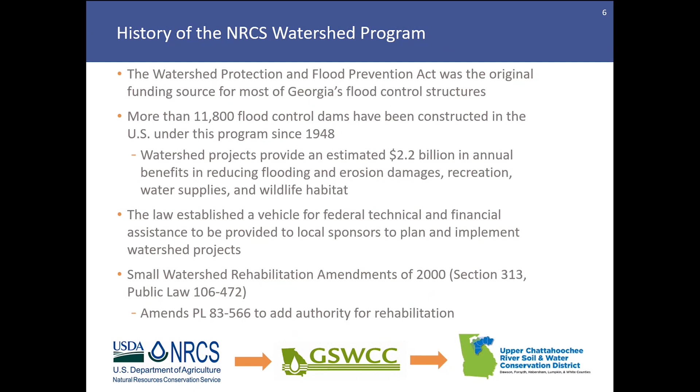In totality, the watershed projects in the United States provide an estimated $2.2 billion of annual benefits by reducing flooding and erosion damages, providing for recreation and water supply and wildlife habitat. The law established a vehicle for federal technical and financial assistance to be provided to local sponsors to plan and implement watershed projects. Small watershed rehabilitation amendments of 2000 added authority for rehabilitation. Projects eligible for federal assistance include flood mitigation, watershed protection, water supply, water quality management, agricultural water management, public recreation, and watershed structural rehabilitation.

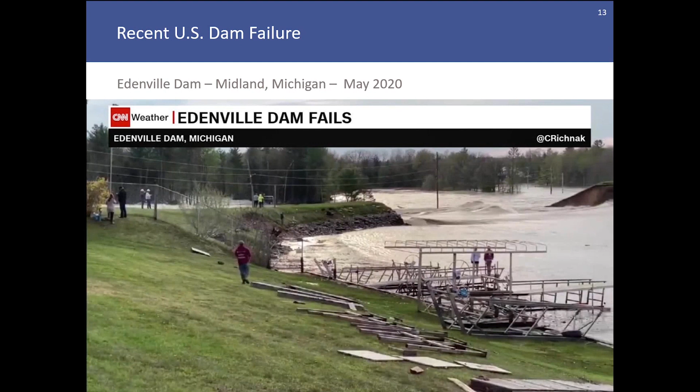Dam safety agencies include the Federal Energy Regulatory Commission, the NRCS, FEMA, the Federal Emergency Management Agency, the U.S. Army Corps of Engineers, the United States Bureau of Reclamation, and the Georgia Safe Dams Program, Department of Natural Resources.

The Georgia Safe Dams Program began with the Safe Dams Act of 1978, largely in response to the Kelly Barnes failure in Toccoa. By definition, a dam is an artificial barrier, including appurtenant outlet works such as spillways, pipes, risers, etc., which impound or divert water. Specifically, the dams have to be 25 feet or more in height from the natural bed of the stream or watercourse, or, and that's an important distinction, have a maximum impounding capacity of at least 100 acre-feet.

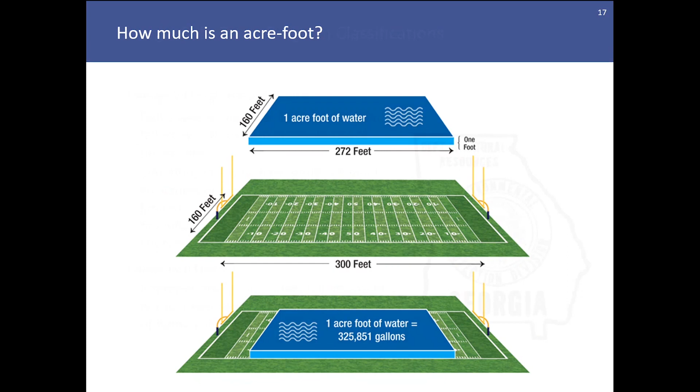In essence, the Georgia Safe Dams Program has 3 classifications: exempt or not even considered for regulation, which will not be discussed, Category 2, and Category 1. Category 1 are high hazard dams where improper operation of a dam would result in the probable loss of human life. Situations involving the probable loss of human life include occupied structures or facilities, not limited to residences, commercial buildings, manufacturing facilities, schools, churches, playgrounds, etc.

Category 2 dams are structures that are large enough to be regulated, but where improper operation or failure would not be expected to result in the probable loss of human life.

Briefly, I'd like to discuss the components of a dam. The principal spillway, which many people call the drop inlet, is located in the lake. The principal spillway, or riser, or drop inlet, is attached to a conduit that passes beneath the dam and terminates into the outlet works, stilling basin, or plunge pool.

The auxiliary spillway, which can be concrete or earth, is generally located in one of the 2 natural hillsides on either side of the dam, but at times can be located over the embankment itself. The upstream slope is the angled or sloping portion of the dam upon which the water rests. Engineers consider dams looking in the direction of stream flow, so the downstream slope, or the dry side, would be opposite the upstream. The abutment is the contact upon which earth fill is placed against natural ground to form a dam.

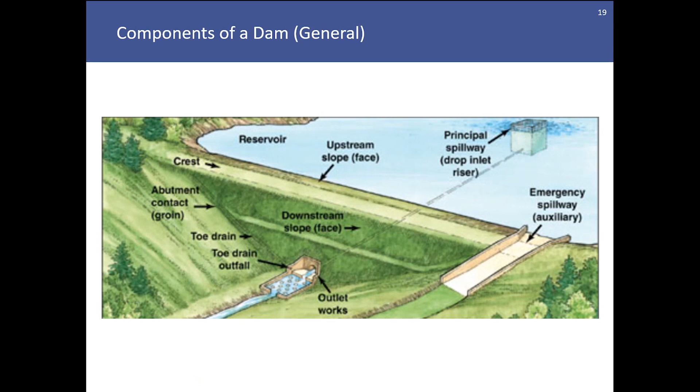For the Settingdown Creek dams, or the watershed dams, the existing facilities have earth-cut auxiliary or emergency spillways and have principal spillways or drop inlets or risers connected to circular conduits through the base of the dam. On the upstream side of these drop inlets or risers, there are gate valves that can be utilized to lower the water.

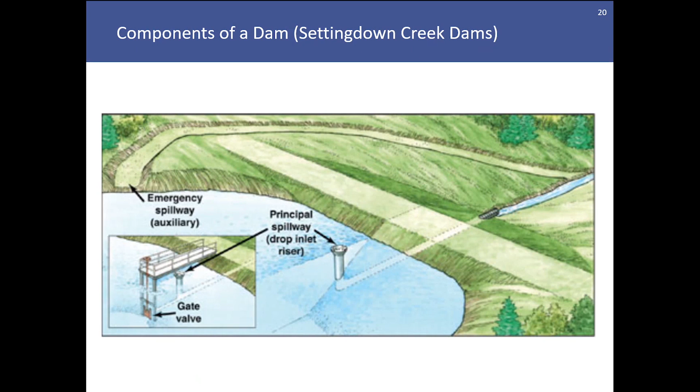The Settingdown Creek watershed is located in the northern portion of Forsyth County, Georgia, and is a tributary of the Etowah River. The watershed contains over 34,000 acres of drainage area or land that drains to the creek. The original watershed plan, which was prepared in 1954, provided for the construction of 15 floodwater retarding structures or dams. Note that I said earlier that Forsyth County has a total of 17 floodwater retarding structures or dams. Therefore, the Settingdown Creek watershed has the vast majority.

The map shown here provides an outline of the Settingdown Creek watershed. As shown, a small portion of the watershed extends into Cherokee County, and an exceptionally small portion of the watershed extends into Dawson County. To aid viewers with the general alignment of this watershed, the blue line on the right side or east side of the watershed is Georgia State Route 400, and the vertical white line near the north arrow is the boundary between Forsyth County and Cherokee County.

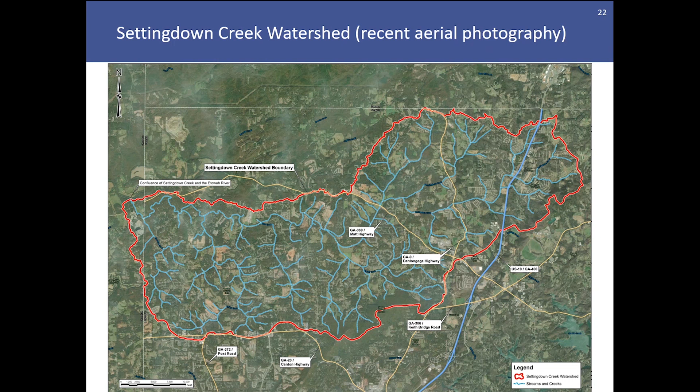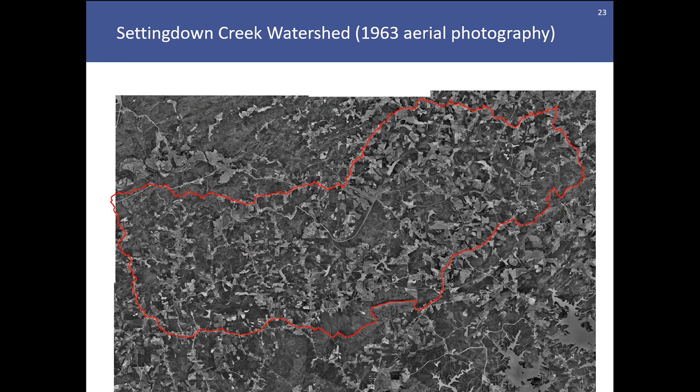The map shown before you depicts the aerial photography of the same watershed in 1963. As shown in this photograph, Forsyth County was largely comprised of agricultural activities, especially in this location, whereas today there are a significant amount of developments in the northern end of Forsyth County.

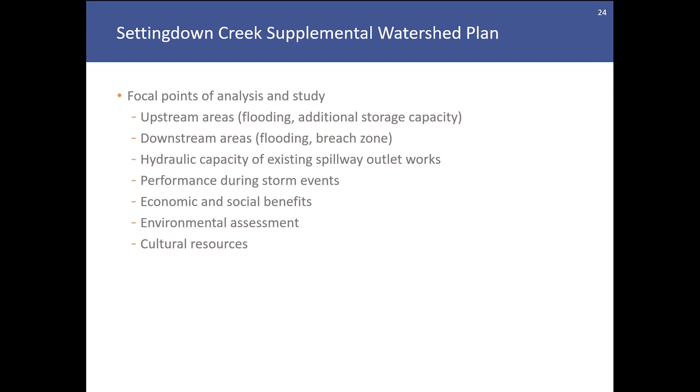For the supplemental watershed plan that's being developed, there are numerous focal points of the analysis. Provided below are some of the items that will be considered: upstream flooding, additional storage capacity, downstream flooding, a potential breach zone should the dam fail in a catastrophic manner, hydraulic capacity of the existing spillway system, how the structure performs during various storm events, an evaluation of the economic, social, and environmental benefits, and then there will also be a review of cultural resources in the vicinity of each project.

As stated previously, there are 15 dams in the Settingdown Creek watershed. The current study only considers the ones shown here. As a refresher, we will be looking at Settingdown Creek dams number 4, 6, 27, 54, 56, and 59. These dams meet the criteria of definition for a Category 1 dam. Specifically, these dams meet the height and volume requirements of the Georgia Safe Dams program to be considered a dam, and failure or improper operation of these dams would likely result in the loss of human life. However, these dams do not currently have a permit from the Safe Dams program.

In addition, previous assessments or evaluation of these structures indicate that the dams and/or spillway systems do not comply with the current rules and regulations for high hazard dams. Specifically, these dams are not exempt from SDP or Safe Dams program rules and requirements. One purpose of the supplemental watershed planning study, the ongoing study, is to evaluate whether or not federal assistance will be available to bring the structures into compliance with current dam safety rules and regulations. The Georgia Safe Dams program is aware of these structures and will be part of the planning process.

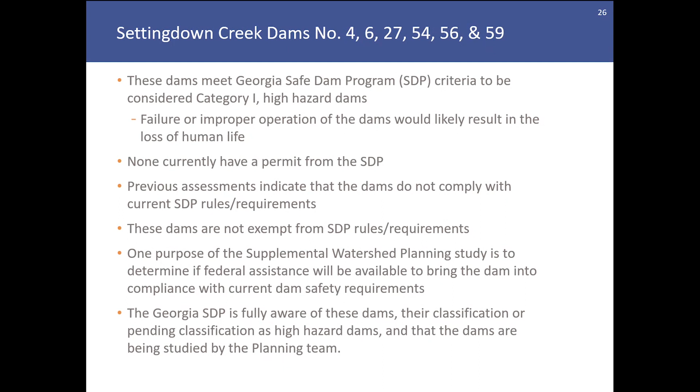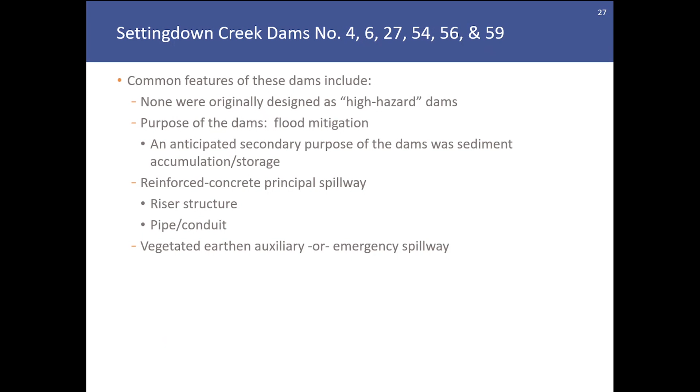For the Settingdown Creek watershed dams, some of the common features include: none of these structures were designed as high hazard facilities. They were intentionally designed for flood mitigation with a secondary anticipated purpose of sediment accumulation and storage. Each of the structures has a reinforced concrete riser and pipe conduit and a vegetated earthen channel auxiliary or emergency spillway. Please note that the term emergency spillway does not mean that there's an emergency if it activates. Auxiliary is a better term, as it's a helping spillway to help discharge flows from the reservoir.

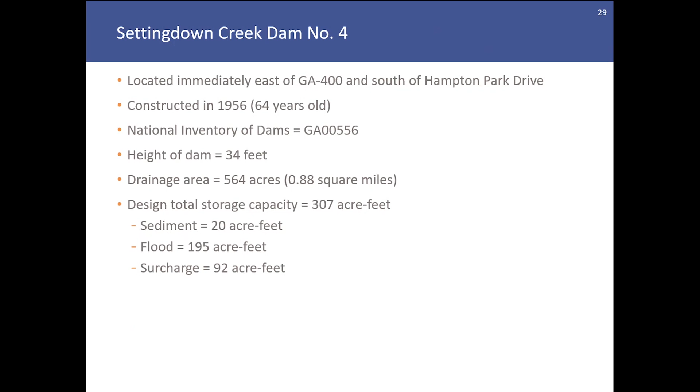Settingdown Creek Dam number 4 is located immediately east of Georgia 400 and south of Hampton Park Drive at the edge of the Hampton Golf and residential community. The structure was originally built in 1956 and has a height of approximately 34 feet. The drainage area or size of the land contributing runoff to the dam is on the order of 564 acres. The total capacity of the structure is shown at 307 acre feet, with the apportionment between sediment, flood, and surcharge storage capacity shown below.

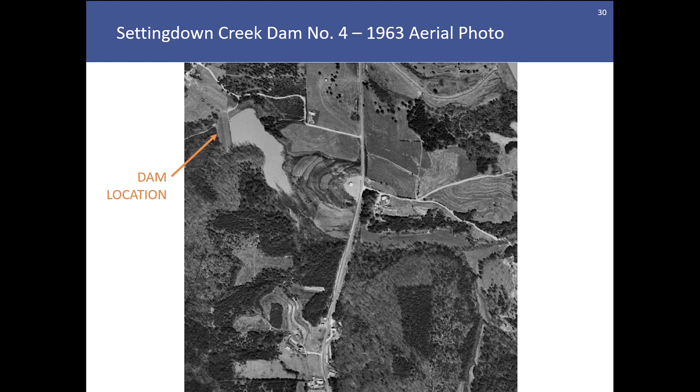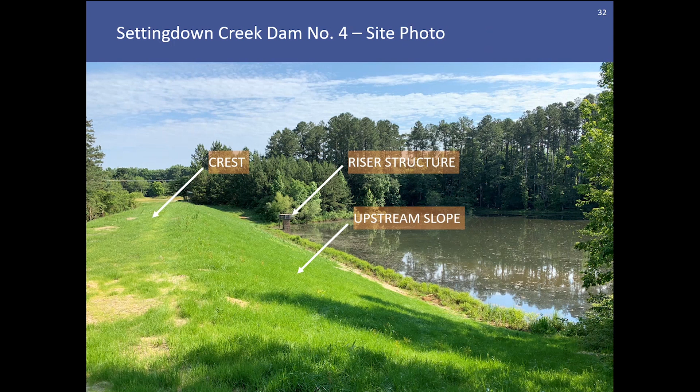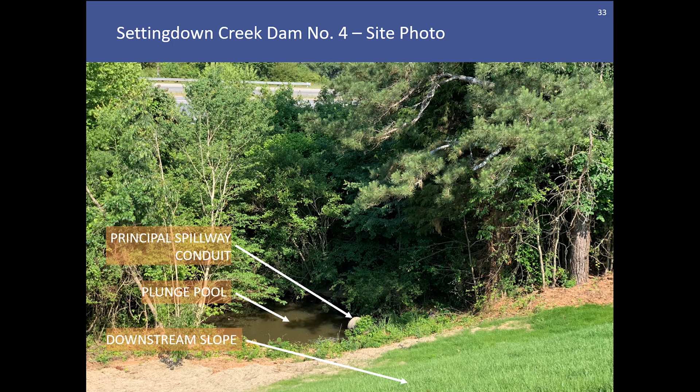This is a photograph of the current condition of the dam taken within the last several months. The crest, or the high point of the dam, is shown, as is the riser structure in the upstream slope. The principal spillway conduit is highlighted, as well as the plunge pool and downstream slope. Shown in the background of this photograph is Georgia State Route 400, which shows the proximity of this dam to a key transportation arterial within the county.

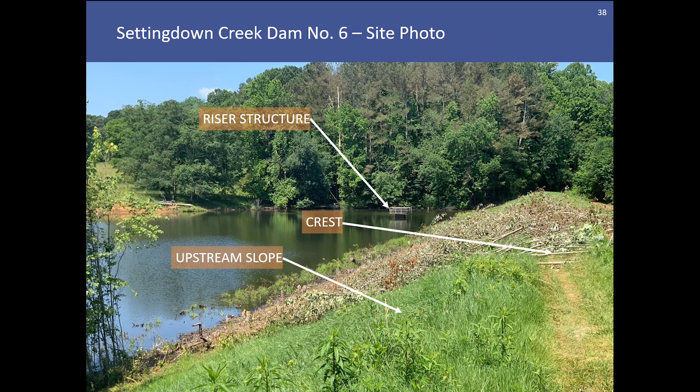Depicted here is a current site photo taken within the last 3 or 4 months. The riser structure, crest, and upstream slope are shown. And a close-up of the downstream toe depicting the principal spillway or outlet conduit, plunge pool, and downstream slope are now shown. Note that this structure, like the other structures, was recently cleared of woody and other vegetation in preparation for this planning study.

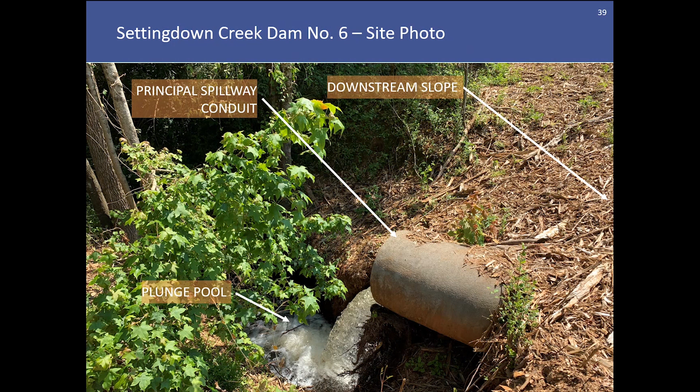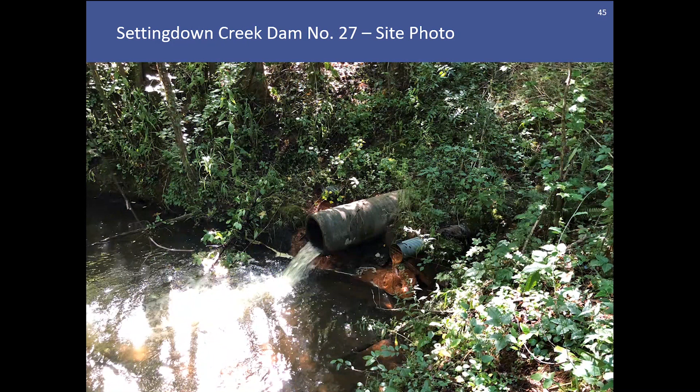The downstream slope of Settingdown Creek Dam number 27 is shown here. You'll see the principal spillway conduit. Not shown in some of the other photographs are 2 corrugated metal conduits. These conduits are affixed to an internal drainage system to collect and convey seepage water that is occurring through the dam to the downstream toe.

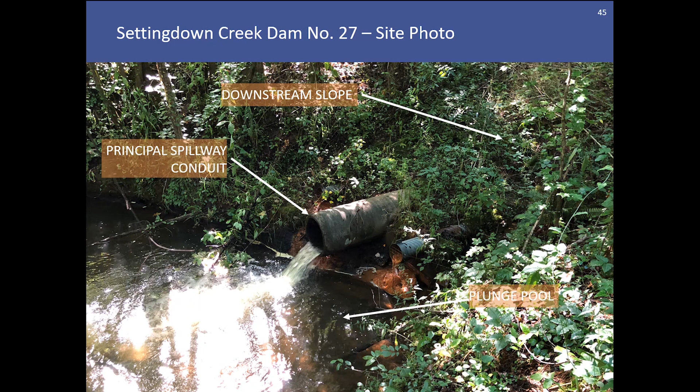The next one's 56. Located north of the intersection of the Dahlonega Highway and Burruss Road, Settingdown Creek Dam number 54 was constructed in 1954 and has a height of approximately 31 feet. The drainage area contributing runoff to the dam and impoundment is on the order of 1,570 acres. And the project had a total storage capacity of nearly 700 acre feet, with the apportionment of sediment, flood, and surcharge shown below.

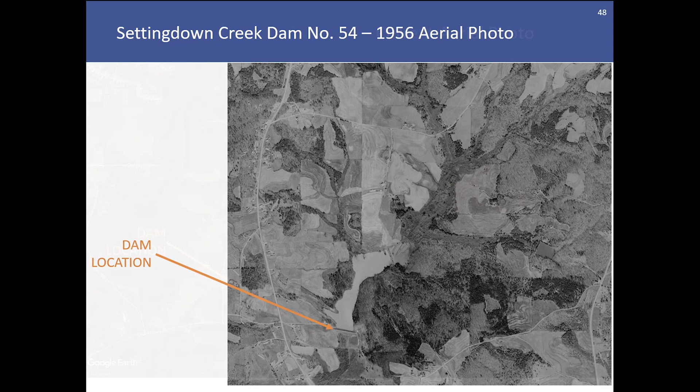A 1956 aerial photograph of Settingdown Creek Dam number 54 is shown here. Similar to other projects, this historic photograph depicts the watershed as being largely agricultural. A current aerial photograph of Settingdown Creek Dam number 54 shows significant development within the watershed, specifically on the eastern side adjacent to Hopewell Road.

A current site photograph of dam number 54 is shown here. The riser structure is a little closer to the embankment than previous projects. The upstream slope and crest are shown.

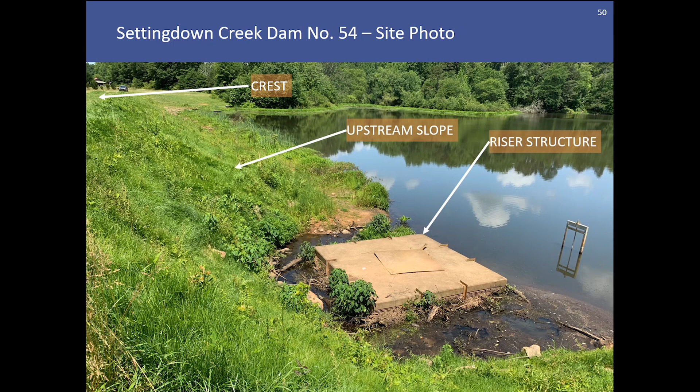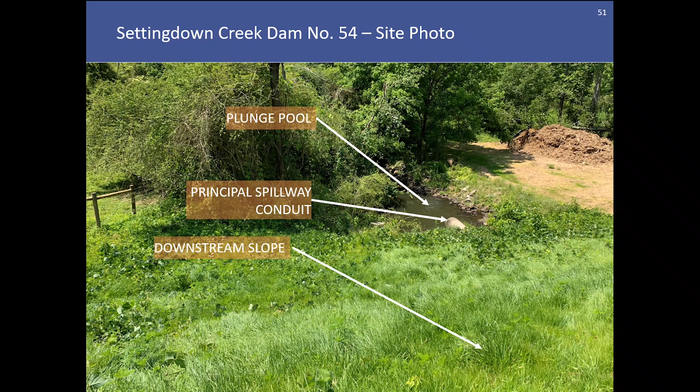Now, for Settingdown Creek Watershed Dam number 56. This project is located immediately to the east of Settingdown Creek project number 54 and is located almost immediately west of Georgia State Highway or State Route 400. This project, as I said, is located west of Georgia State Route 400 and is immediately north of Hubbard Town Road. This project was constructed in 1954 and has a maximum height on the order of 37 feet.

The drainage area contributing runoff to the reservoir is on the order of 618 acres. The total design storage capacity of this project is 283 acre feet, with the apportionment of sediment, flood, and surcharge capacity shown below.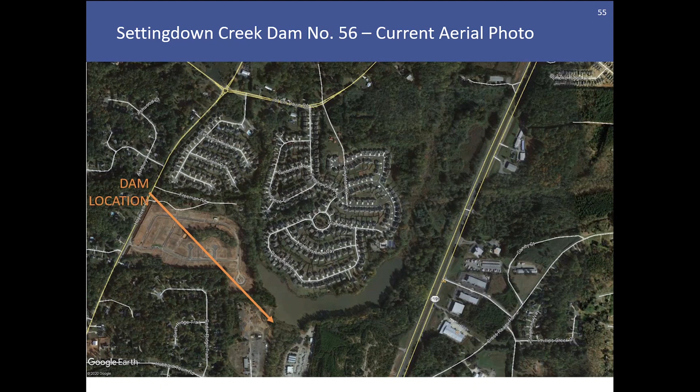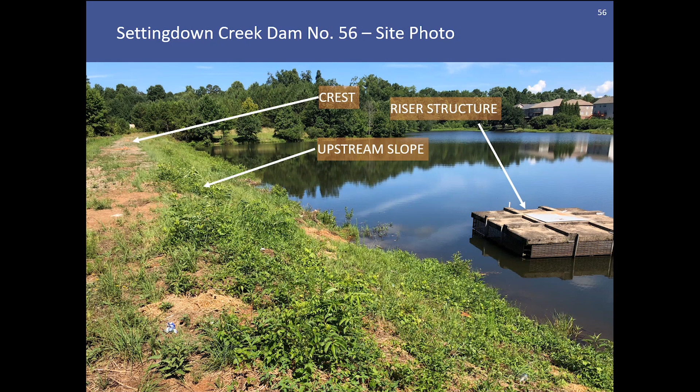A relatively recent site photograph of Settingdown Creek Dam number 56 is depicted here. The crest, upstream slope, and riser structure are highlighted. Note the presence of a residential development located along the shores in the top right-hand side of the photograph. The downstream slope of Settingdown Creek number 56 is depicted here. The downstream slope, principal spillway conduit, and plunge pool are noted.

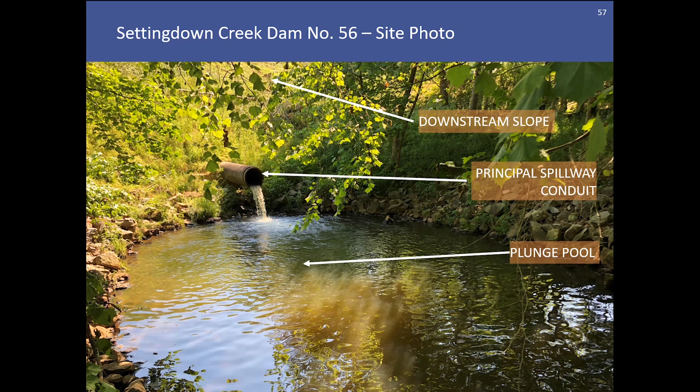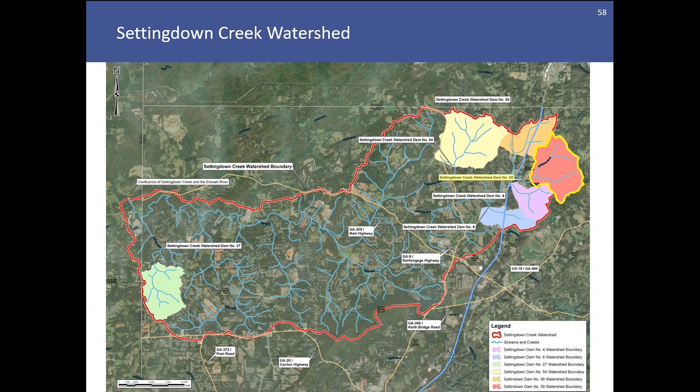The final project, or Settingdown Creek Watershed Dam, in this planning study is Settingdown Creek Dam number 59. This project is highlighted in yellow and is located immediately east of Settingdown Creek Dam number 56, albeit on the east side of Georgia State Route 400. This project is located adjacent to Hampton Golf Club south of Glenhaven Drive and was constructed in 1954.

The dam has a maximum height of 32 feet and has a drainage area of 1,155 acres. The design total storage capacity is 586 acre feet, with the apportionment of sediment, flood, and surcharge capacity shown below.

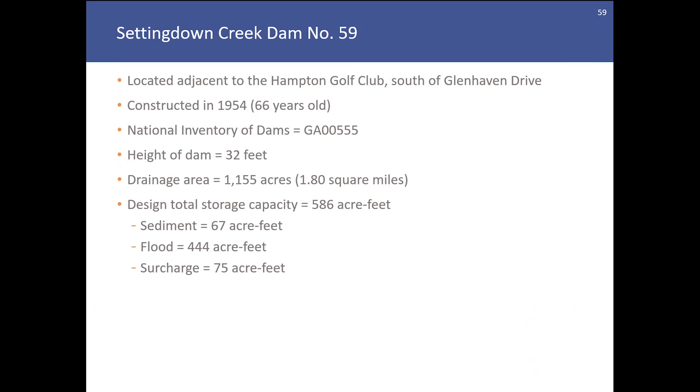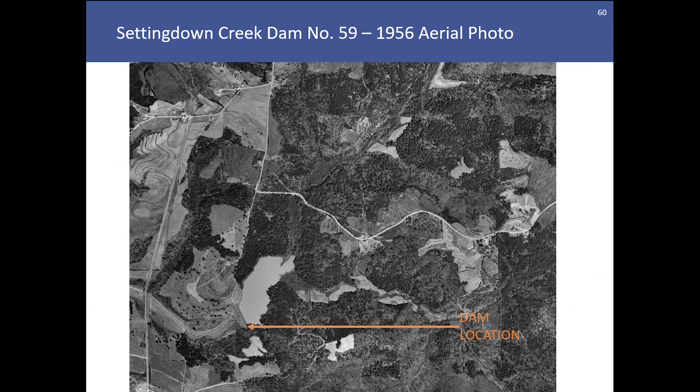Similar to the other projects, a historical aerial photograph is shown with the dam and the watershed contributing runoff being largely agricultural or forested. A current aerial photograph is now shown in which substantial development within the watershed is noted.

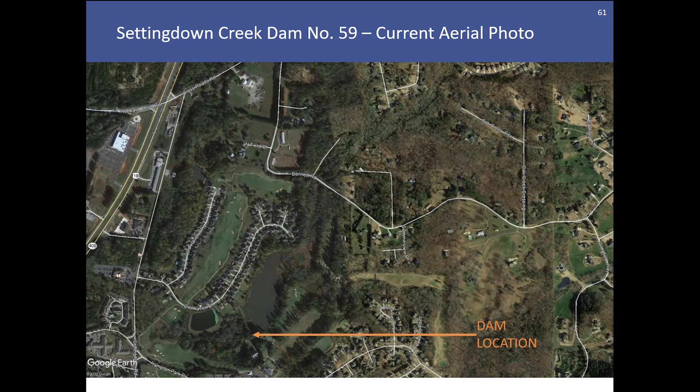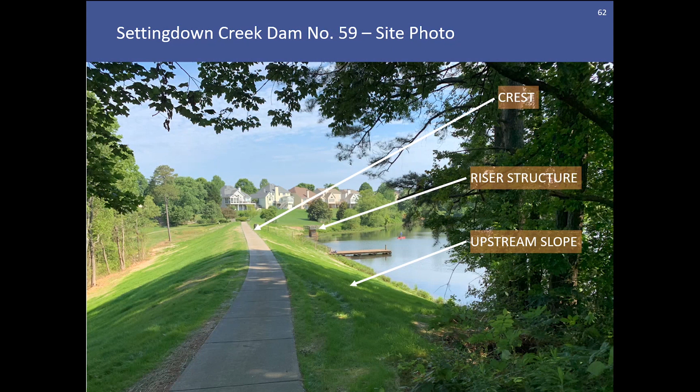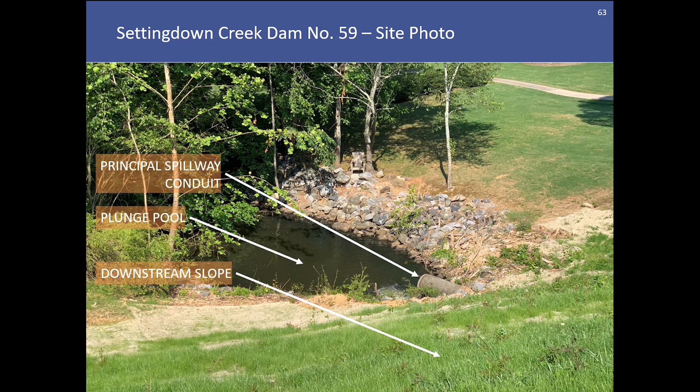Now, for the scope of the supplemental watershed plan, the scope is defined as the range of actions, alternatives, and impacts to be considered in the environmental assessment. Scoping is used to identify significant issues that may be considered during a detailed analysis and to eliminate or vet issues that are not deemed as being as significant as others.

Identification of scoping concerns begins with this initial public meeting. Scoping in general will solicit the involvement of federal, state, and local agencies, public interest groups, property owners, as well as upstream and downstream stakeholders. Issues and concerns identified through scoping will be addressed in the plan document.